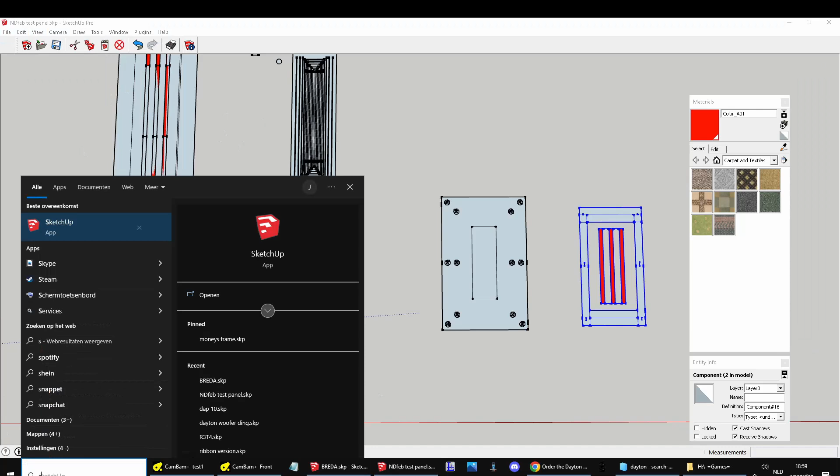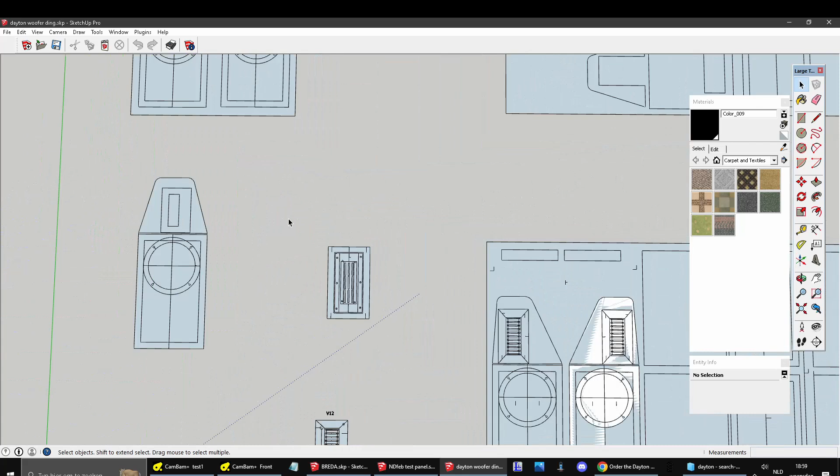So anyhow, I need to make something that is a companion to the tweeter. Let me grab the Dayton thingy. Here you can see how many tweeters I tried, so don't think it's gonna be that easy. It's all tweeters here. But there's the actual mini monitor. And why I opened this is because the measurements of the woofer layout are in here, which is helpful, of course, and the height.

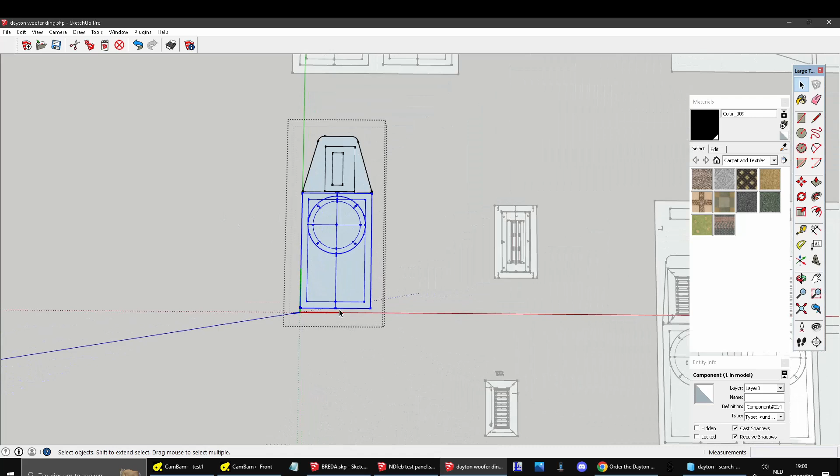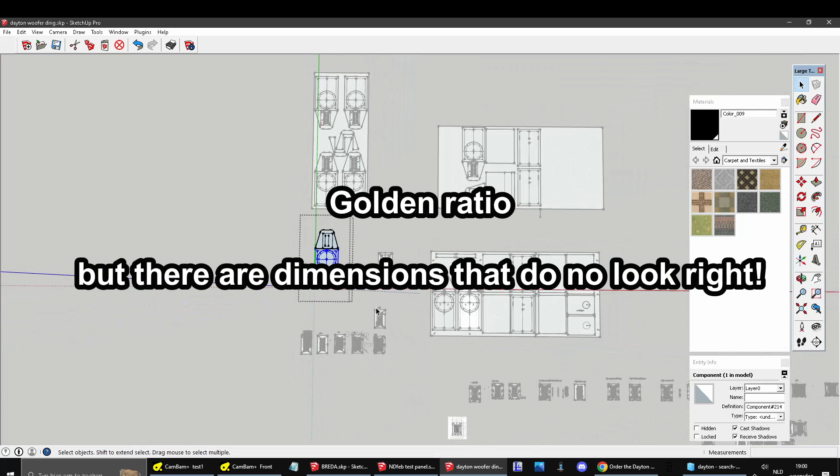Now, for this tweeter, because it's quite directional, it needs to be a little bit higher. Still, I might have to tilt the stand, depending on where people are sitting and what kind of listening room it is, because it's beaming pretty hard, not super hardcore, but still it beams. So I might have to jack up the stand. But if I just make the speaker much larger, it becomes very ugly in dimensions. I probably am not using the golden ratio, but still, some sizes do not compute.

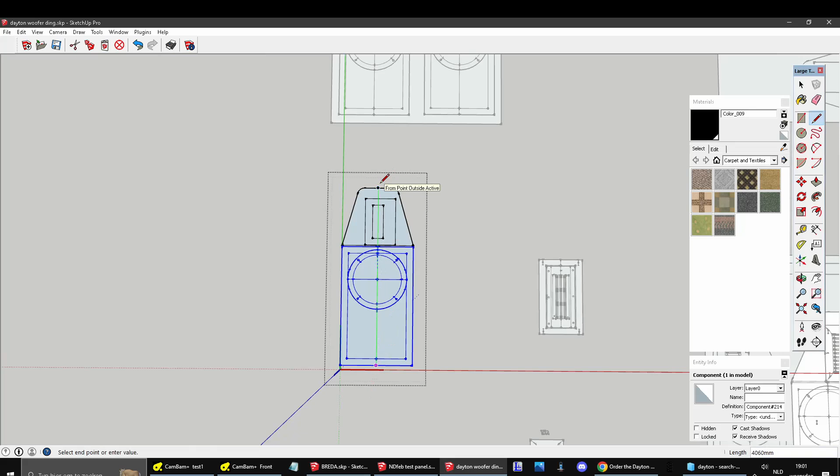So what I drew up right now is kind of a squarish thingy, 45 centimeters compared to the original small Dayton thingy, which is I believe around 40. So this is 5 centimeters taller, which is not insane, but it is some. It also is a little bit wider, and the problem with that is that the depth becomes less and less. Speakers in the 60s and 70s, or really cheap speakers, are like half as deep as they are wide, which is not very common nowadays. So the intention is to round off these corners a little bit.

So this is the front of the speaker, this is the layout. The tweeter is here in a separated compartment. I did not show that, but I put my tweeters in some IKEA boxes to see if I can damp out the wave that's coming back, and I can, and it helps the low end quite a bit. So this is the first time I'll have the tweeter in an enclosure instead of open baffle. So fingers crossed.

I am gonna use the Dayton DS135, and the reason is I still have 2 of them. That's one good reason. I looked up all the drivers I have, and I have some SB Acoustics which use like 45 liters of enclosure, which is way too big. This is around 7 normally, so that's not gonna work. I tried the Tang Band subwoofer, which is, well, it's in the name. It is a subwoofer. Above 100 hertz, everything goes to shit. So I don't want to match that with a tweeter, because it still has to play at least 500 or 600 hertz above that, maybe more.

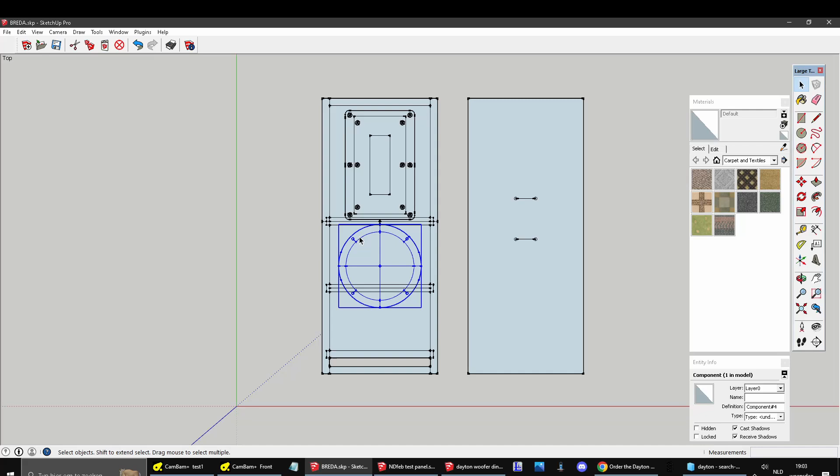And it sounds terrible. I have a problem with measuring woofers in my room. Well, I do kind of know why. It's probably my ceiling that resonates, but you cannot locate it. So you hear a resonance, you hear distortion, and you have no clue if it's the woofer. It sounds like it is the woofer, and it still might be, but it might also be the ceiling, which is aluminium slats.

So today I tried several woofers. Shall we look them up? Okay, wait. Sound Imports. Why is it always going to GRS products? I don't want GRS. SB Acoustics. I tried a 6-inch woofer because the tweeter goes so low. You could easily use a 6-inch or 8-inch woofer, which is kind of funny. Normally you cannot, it gives problems. So I thought that would be nice, a monitor that has a pretty huge woofer.

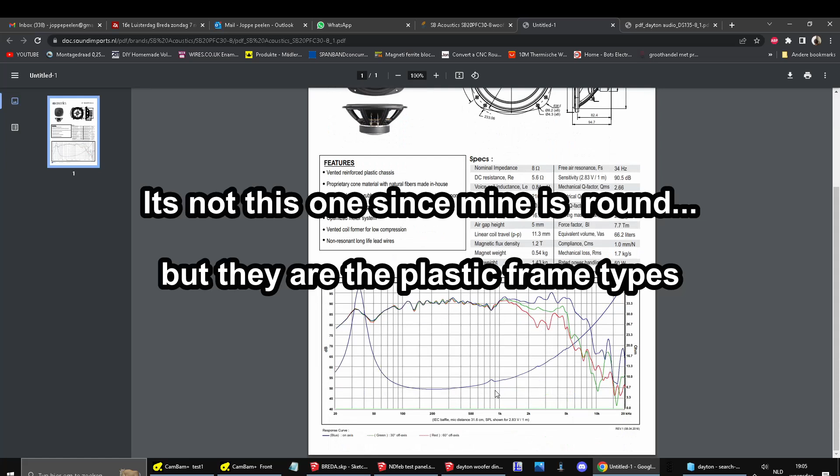It is the one that I was given. It's this one. It's nice, cool, but they do not show a distortion plot. And around 300 up till 600, there is quite a nasty distortion. But it might be my room, I'm not sure yet. So this one uses like 40 or 45 liters, so I cannot use it. Maybe an open baffle, but it's also not the best open baffle candidate. So I skipped that one.

Then I tried a woofer that I still had laying around, a more expensive one. It's a smaller size, the 6-inch, which is also a very nice size. Let me take a look. This one, but then the 8 ohm version. I'm not sure if they have it. It's SB17NRXC35.

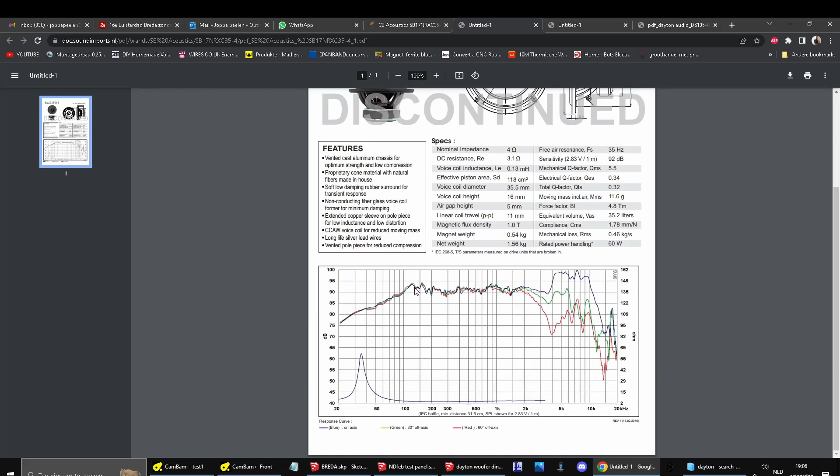Yeah, it should be this one or this one. Maybe the same. No, they are twice. It's this one. Also looking good, but it's, well, not really. It's really a mid-range, as you can see. It drops off at 100 Hertz, so not of use.

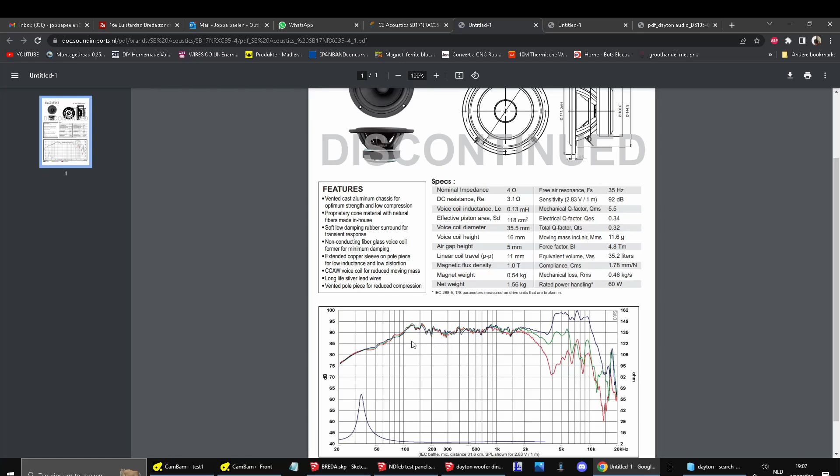And I only have one second hand, and I could buy a second one, but it's like 80 euros or something. What is it? 71, okay. But I don't want to spend 71 euros for a mid-range. And they might not match even, or just look similar, which I don't like.

Not working. So then I thought the Tang Band, which is the worst of all, because it's really a subwoofer. This beast. It's really nice for a subwoofer, and I have plans for these. And I did not want to throw in 100 euro woofers in this contraption.

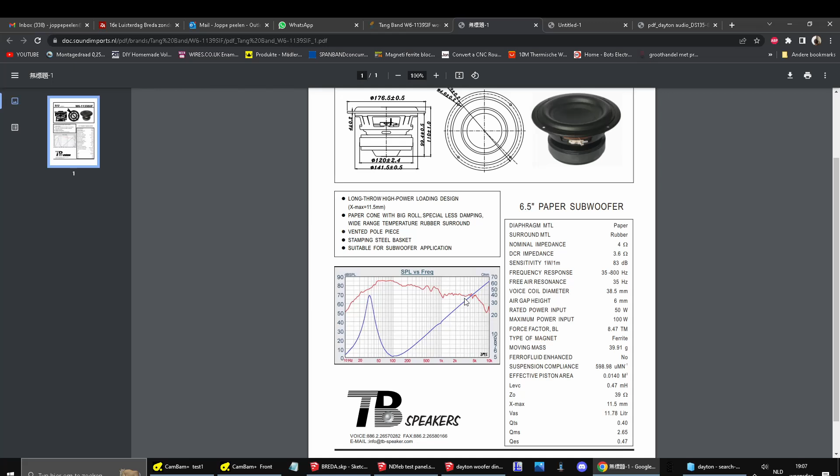But the biggest problem is this. It's very low efficient, which is usually not a big deal for me, but here there is a problem. And in the real measurement, so not from their side, it's way worse. And the distortion around 200 to 600 is insane. That's exactly the crossover frequency, so I'm not gonna use them.

Too bad. They're really meant for subwoofer duty. 150 Hertz, they will perform well. Above that, they suck big time. So I'm going back to my DS135, and in this case the paper cone, if it's still available. Let's see. Yeah, because the other one is DS135A, I believe. So this is the paper cone, I think.

Yes, has this kind of... It's also not the cheapest, it's also not very expensive. I mean, some people throw around massive amounts of euros for a woofer. I usually do not do that. But still, it also has problems around 400 to 600 hertz.

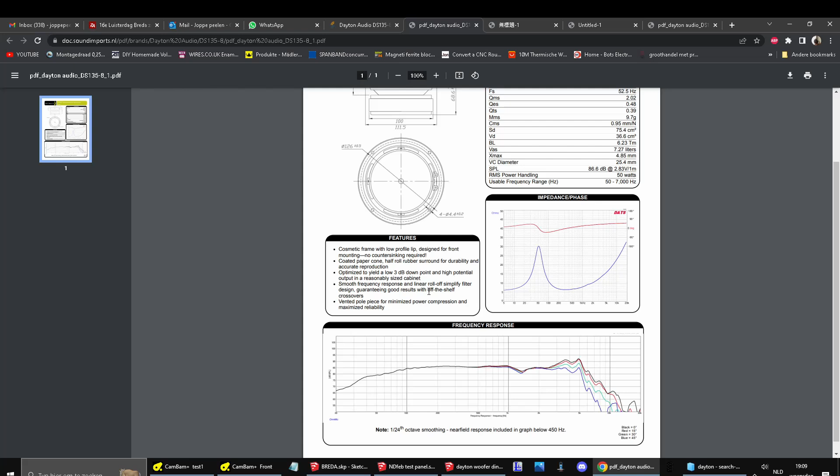So by now I'm thinking it's not possible, even woofers that I looked up in distortion measured really good, and in my case they actually do not. So there is something, I think it's my ceiling even. But it's weird, even if I measure really close, it still comes up. And if this is correct, then most woofers just suck. What is kind of weird, if I measure it from a planar magnetic, it's not there. So, yeah.

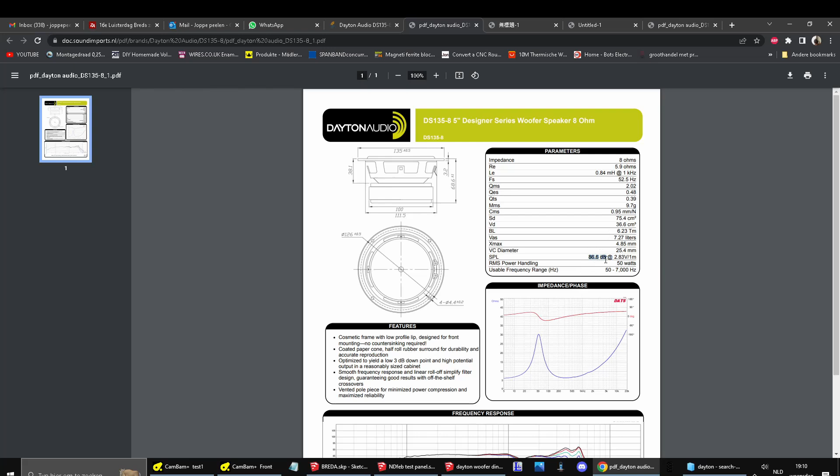Anyhow, this is the one I'm using. It's 86.6 dB, 8 ohms. My tweeter at the moment is around 85 if it were 3.7 ohm, which it's not, it's like 1.8 ohm. And my amplifier does not care. But yeah, I'll have to pad it like 8-9 dB. Also, this 86 is stated around here, where it's most efficient. So if you want to have this a little bit flat, you'll lose all of this.

Anyhow, using WinISD, the old one, the very simple one, and I like the very simple one, to be fair. So I'm creating a new project. I put in the DS135 Dayton in my library. So I choose own drivers and I choose the Dayton. I'll click next. Drivers 1. Well, I use only one. Placement normal, not isobaric. With 2 could be very interesting, but it becomes even smaller. And I'll go vented.

So this is what it comes up with. I want to extend this a little bit lower. Normally I would not do this, but in this case I need the height. So I went for 10 liters, which is quite a bit, and you get a hump here. So I tuned the bass port a little bit lower. I believe it was 52 or something.

And you can see there is a hump and then there is a slight drop, but we're talking half dB. I mean, no one is gonna hear that, and you need a little bit extra down low. So now the -3 dB point is 47, which is rather decent. You cannot play really loud with this, but it was never the intention.

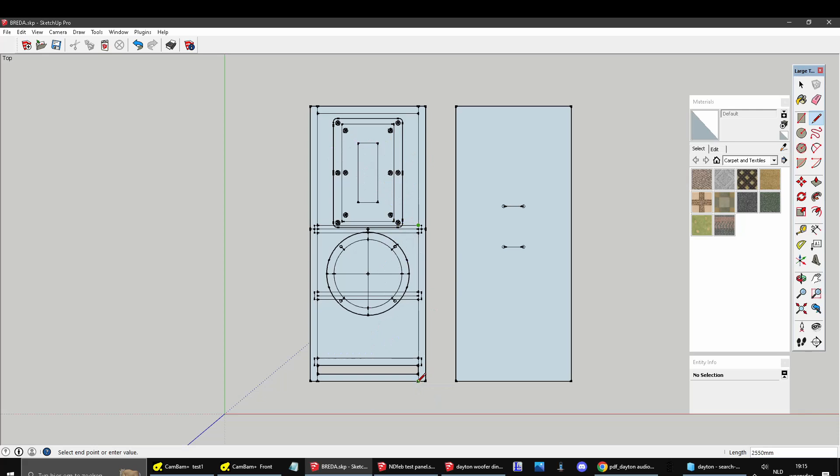Now the woofer part is only up till here. So that includes the 12 millimeter of wood dividing the woofer part from the tweeter part. So this is 255. Here I use a 1:10 ratio, so that's why it's measuring 2550. So it is 255. Then you can just click depth, and it will calculate the depth it needs to get 10 liters.

Now if we look at the vent, so I'll say okay. If you look at the vent, it's almost 190 millimeters, which should fit easily in the depth. I have, well, almost 90 millimeters to spare, minus the wood, which is 12 millimeters. So it's enough, I think.

So that was like really basic how I design a simple woofer enclosure. I'm not saying it's the best way to do it. That's the way I do it. You could use the newer WinISD and say, well, I want to reach 110 dBs, and then you can tune it for that, and then you lose a lot of low end. That's not a big deal for me. I just want something that sounds decent on normal levels, and I could add more woofers if I like, or whatever. So yeah.

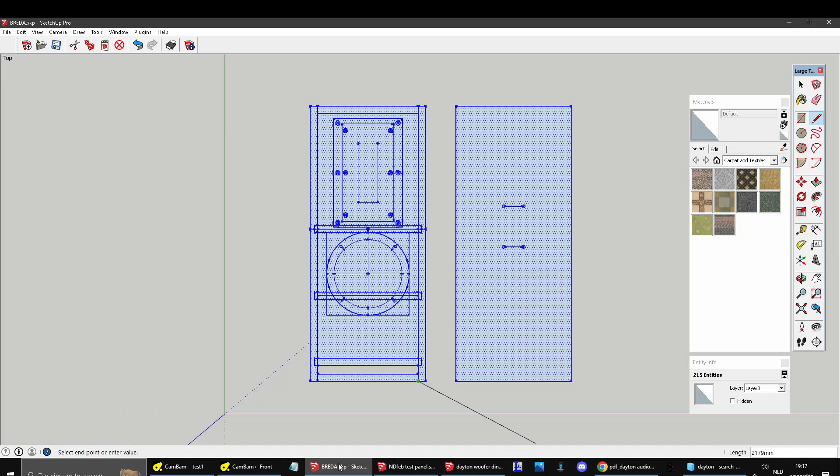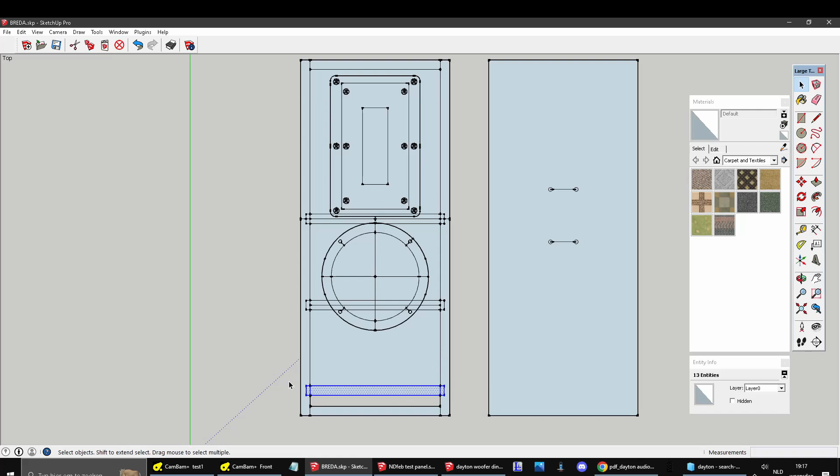So this is the front, this is where the tweeter is sitting. Then there is a dividing piece of wood. Then there's the woofer, and this is going to be bracing. And then the bass port. The nice thing about this kind of bass port is that it's actual bracing at the same time as it is a slotted port. I could add this here and use 2 pieces of wood. Then it would be maybe even a better brace, but I think this is good enough. This is the back side, where the terminals are gonna be, so they'll end up in the right compartment, which would be very nice.

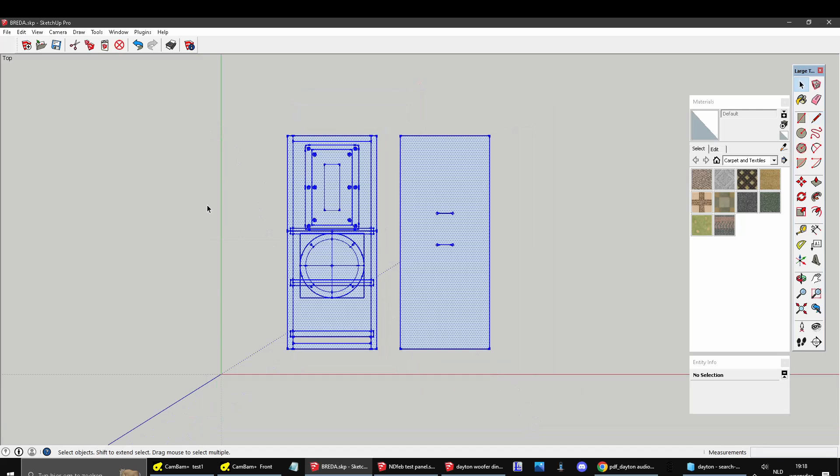And from that I can just look how wide the inner pieces need to be, and I'll probably take some 1 or 1.5 millimeter slop, just to be sure, and just add it with foaming glue. It's your savior. And these parts are just gonna be the size I measure here. So yeah, this is 2D. I'll have to convert it to 3D to have all the dimensions of the different pieces, but this is in short what it's gonna be, and I hopefully can round off these corners.

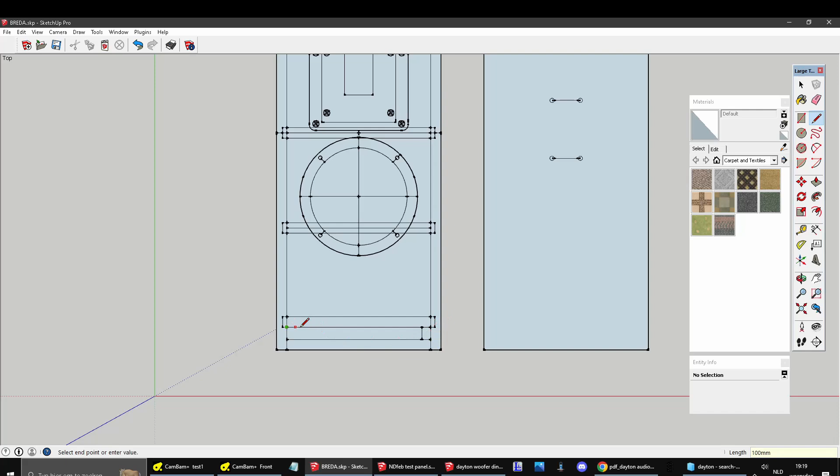So I might actually even make the output on this bass port a little bit smaller. Not sure how much that influences the resonance frequency. The reason for that is that I want to use a roundover bit that is like 20 millimeters, like 2 centimeters or something. At least something large. And here I might not have the clearance. So I might add like 10 millimeter here, extra wood. Something like this. And then this is gonna be the port. I don't think that's a huge problem.

So yeah, short video. And well, hopefully tomorrow I can make some dust.